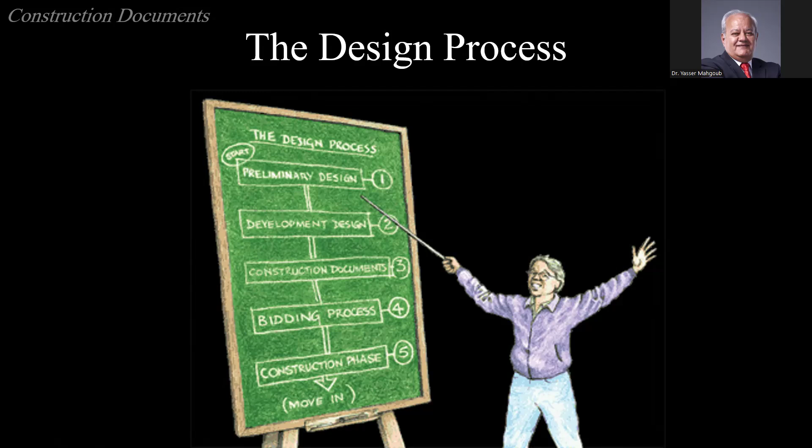So as we said, to remind you, the design process goes through these 5 important steps: the preliminary design or schematic design, the design development, the construction documents, and then the bidding and negotiation, and the construction phase, supervision. And then people start to move into their projects. So the construction documents are the middle and the most important part of your work.

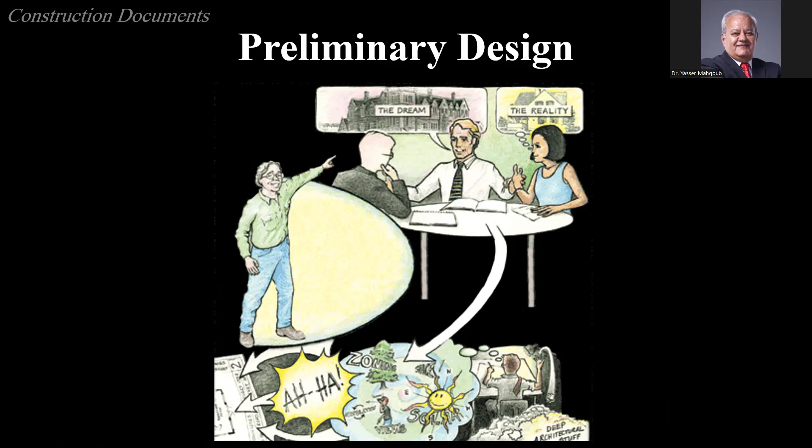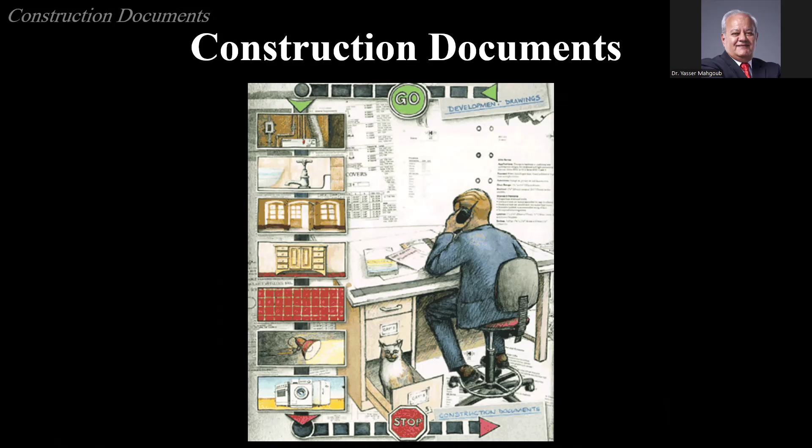So you start with discussions with clients, get their needs and requirements, and you think and produce a preliminary design so that they review and approve. As I said, the approvals should be in writing, not only verbal. And then you go to your office and spend a long time transforming this design into construction documents that will be sent to the contractor to use for the construction. So this is a very exhaustive part of the profession, and the part that takes most of the time and money.

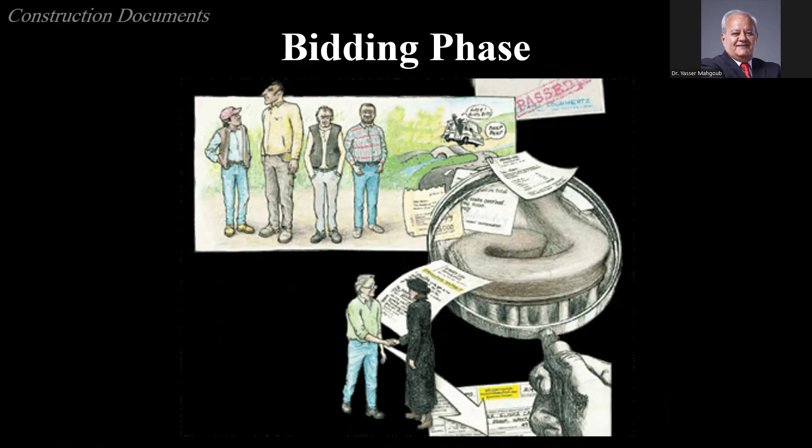After that, when you prepare the documents, you select the contractor based on the delivery approaches that we talked about last time. Is it going to be a single prime contractor or multiple prime contractors or design build, whatever? So you have to work with the client to select the appropriate contractor. Then the contractor will start the work, and you will be supervising the work, so you make sure that the design is implemented and constructed as you want it.

Because contractors might make mistakes, they might make changes, they might not follow the specifications and dimensions. So your job is to make sure that everything is being done according to your design and idea. Otherwise, you will get something else at the end. You design a horse and you get a donkey at the end. So you have to make sure that the design is constructed and implemented according to dimensions, materials, colors, specifications, everything according to what you want.

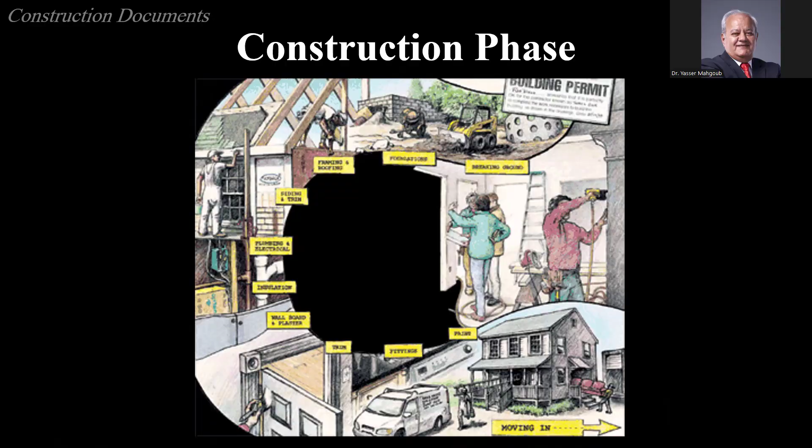So the tool that we use to achieve this is the construction documents that you prepare as an architect, of course, with your consultants, with your other engineers: structural engineers, mechanical engineers, electrical engineers. They all work with you to prepare the construction documents. They prepare the drawings and the specifications. The electrical engineer will give you drawings and specs. The mechanical will give you drawings and specs, and so forth. Everyone will give you drawings and specifications.

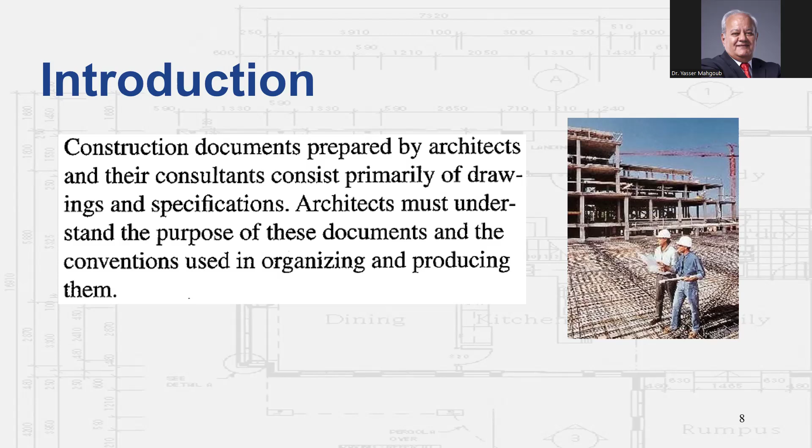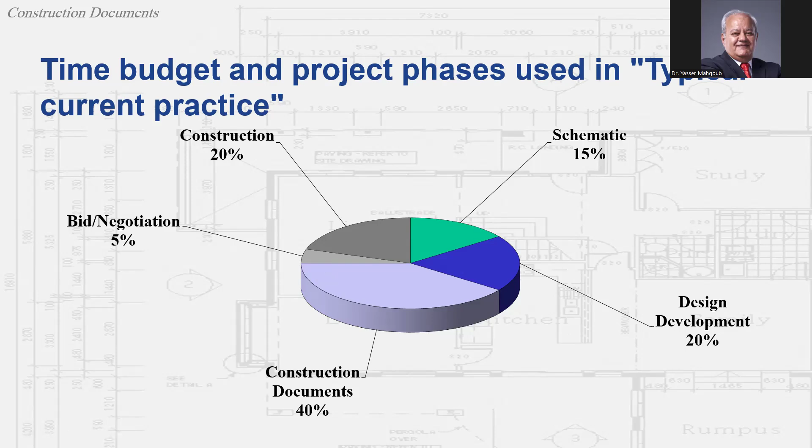So understanding the purpose of the documents is very important, so that you make sure that the drawings are according to your design, not changing it. And there are many conventions that you need to understand and learn to produce these drawings. As I said, we spend about 15% of our time and money in the schematic design. In the design development, which we consider part of the production of the working drawings, and the construction documents, and the bidding and negotiations, about 20, 25, 40, 65% of your time, energy and money will be spent in this part.

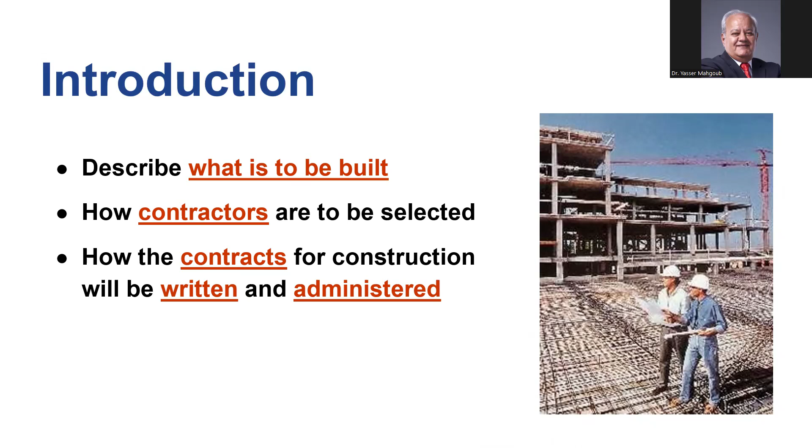So construction documents in general describe in full detail the design or the architecture that you want to build, how the contractor will be selected and assigned, how the contracts for construction will be written and administered, how the contractor will get his money from the owner, how they will be paid, against what. This will all be clarified through the contract documents, which are part of the construction documents. Many people mistakenly think that construction documents are the working drawings. No, working drawings are only one part of the construction documents.

So as an architect, you prepare the documents, the specifications, the schedules, and you assist the owner in preparing the contractual information. And for the contractual documents, you need to get a lawyer. They must be reviewed by a lawyer. Don't take this responsibility alone. You have to hire a lawyer to review any contractual documents required.

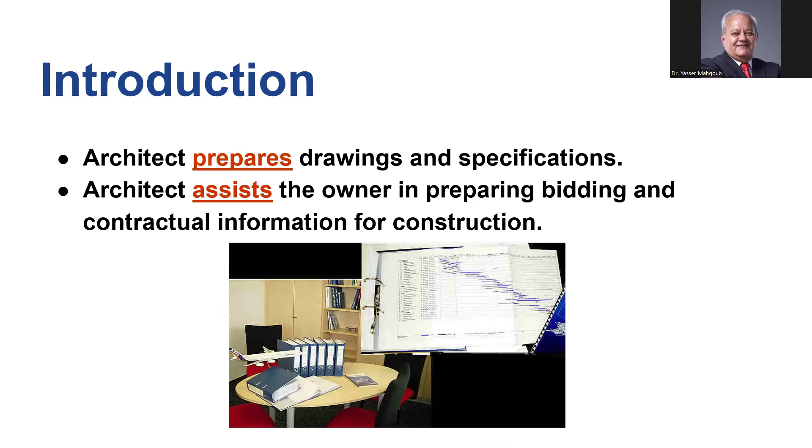So the construction documents communicate to the owner first, because he's the owner of the project, the requirements and the contractual obligations. How will that contractor be paid? How will the owner pay? When? What are the timings for the submissions?

What is the procedure? The contractor will send you a list of items that are constructed. You will go and check that this was done according to the specifications and to the claims that the contractor sends, and then you sign it and send it to the owner. The owner will pay the contractor the money. So your signature means approval of what the contractor did. So it's a big responsibility.

And this can happen six months from now. So you will be responsible for people's lives and owners' money. We will talk about it more in the ethics lecture. So as I said, it will be the base for financial approvals, transfer of money based on the claims sent by the contractor.

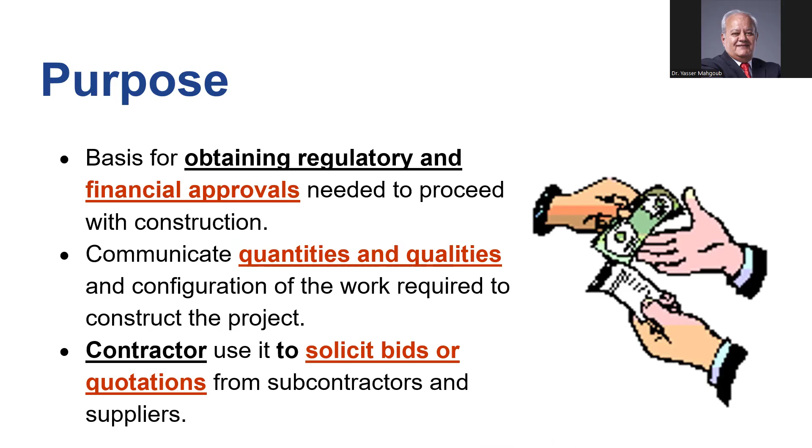The construction documents will tell the owner about the quantities, qualities, and configuration of the work required. And the contractor also uses them to solicit bids or quotations from the subcontractors and suppliers. So your documents will not stay in your office. They will be given to the contractor, and the contractor will give parts of them to the subcontractors. The subcontractors will take them to the suppliers. So they will be all around. So they have to be correct and reviewed carefully.

What would the contractor do? The contractor must think in detail about the construction means. It's not enough that you have a drawing for the building to be built. No, he has to think about the process. How will I get the machinery? How will I get the workforce? How will I get the material? Where will I place it? How will I protect it? Because materials can be stolen from the site. So all these methods, techniques, sequences, procedures. Site safety is very important for contractors. They have to make sure that the site is safe for the workers.

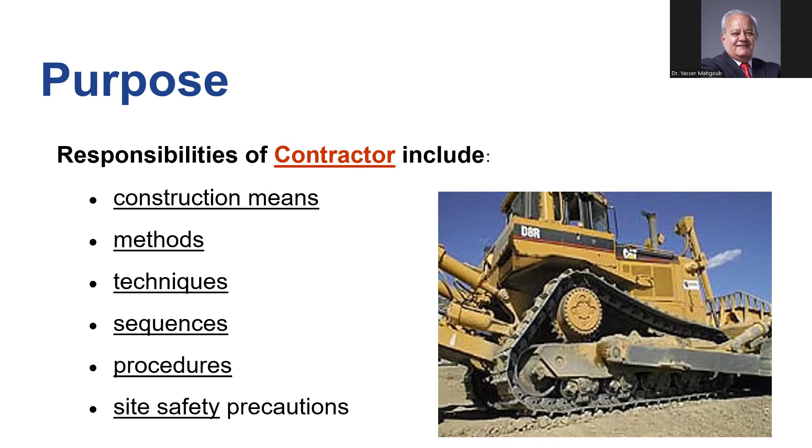They also include assigning subcontractors, a lot of logistics in the site that need to be considered, the sequence of work, who is doing what, when, because he needs to bring the concrete work and the woodwork and the glass work, and who's coming when, and how they don't interfere with each other according to a specific sequence and scheduling.

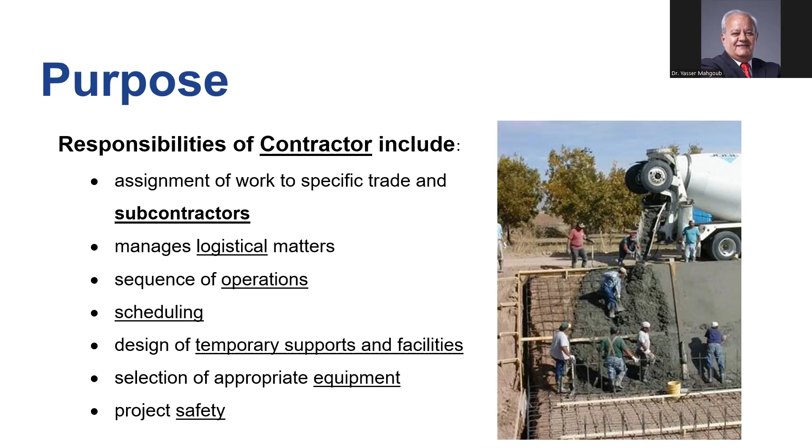They also provide what we call shop drawings. Shop drawings are also an important part of the contractor's work. Based on your drawings, they produce another set of drawings called shop drawings. These drawings specify how many tiles will be placed in this room and what is the distance of this tile. And they draw everything in full detail. And they send it to you to make sure that your 1 to 100 drawings are conforming with their 1 to 20 or 1 to 10 drawings. So this is also another responsibility.

So the construction documents are not only design or graphics, they are also legal and organizational documents. So they must be clear, no redundancy, no omissions, no missing information, no ambiguities, no contradictions between drawings and specs, because this is a very common problem, that you draw something and the people who are doing the specs or the quantities write something else. So they have to be coordinated. Or your drawings with the structural engineer.

In the ground floor, you draw the columns 60 by 60 all the way up the 20 floors. No, they can be 40 by 40 in the upper floors, and they can be 1 by 1 meter in the ground floor. So the columns will increase in size. So how will they affect the design, the corridors, the doors, the windows, and everything? So you have to review all this, the ducts, the risers of the electricity, the ducts for the plumbing, everything has to be coordinated.

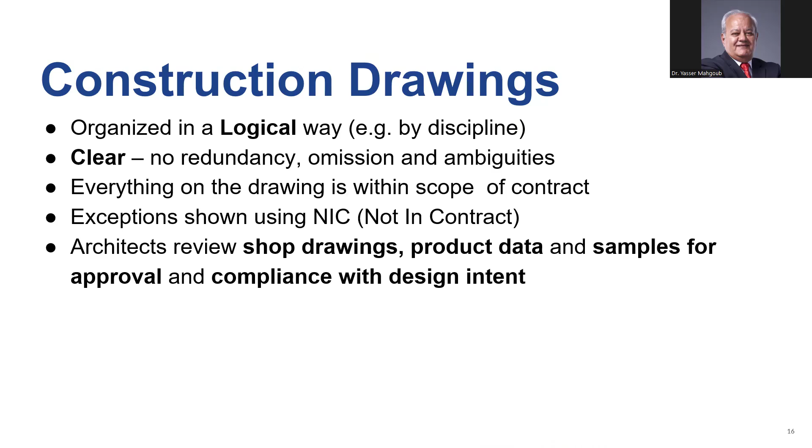Product data. The contractor will send you samples of materials and you sign the sample. Which marble you want to use, which color, which wallpaper. So you have to verify and approve all this, and make sure that it's complying with the design intent. So you have several roles as an architect.

One role is to assist the owner in preparing the bidding, but you are not required to prepare the legal documents. This has to be done by a lawyer. You have to hire a lawyer to do that. You are not professionally qualified to do this. You are required to assemble the bidding documents. So you have the drawings, the contractual documents, the specifications, and so forth, and bills of quantities all together. So you have to work on assembling this with labels, with names and everything.

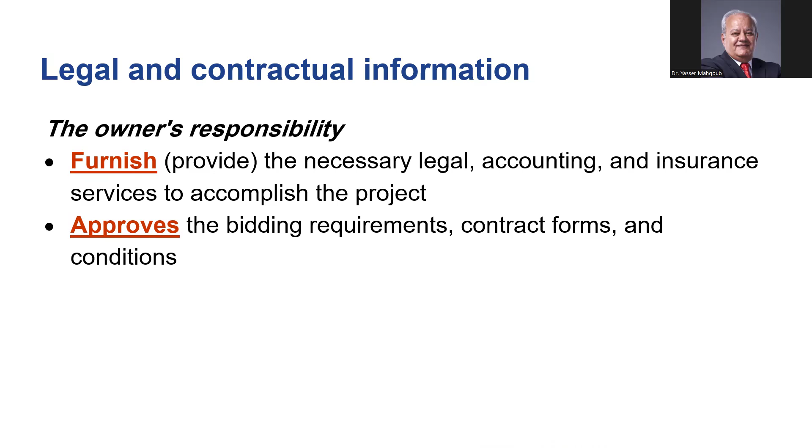And furnish or provide any necessary legal, accounting and advice for the client during the contract. And of course, approvals of the bidding. So the construction documents, they have several parts. They have the bidding requirements. This is an important part in the beginning.

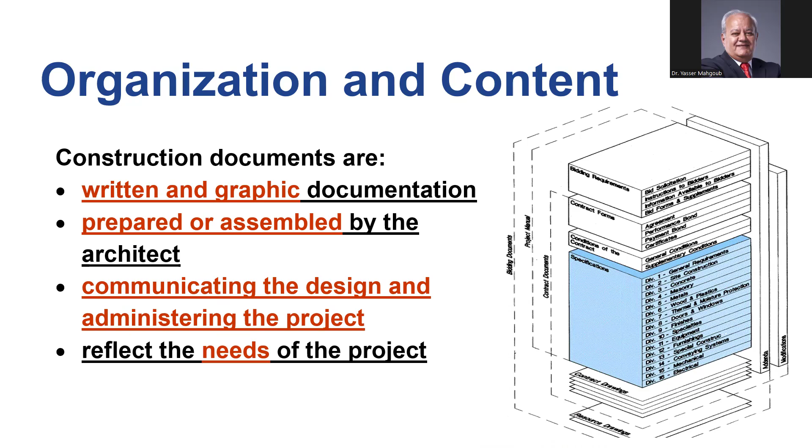The contract form, the conditions for the contract, all these are legal documents for the contract. And then you have the specifications for the materials and the contract drawings. And these are another story, the drawings that you prepare with your consultants and so forth. And the resource drawings or the shop drawings. So it has written documents. You have to know how to write them and review them, especially the specifications and bills of quantities. You need to prepare and package the document and make sure that they reflect the project.

So you have 3 items: legal documents, procedural administrative information, and architectural and construction information. So these are the 3 types of information that are in your construction documents: legal, contractual, procedural, administrative, and architectural and construction information. If you have large projects, you have to, of course, spend more time and energy to prepare. You have the option to separate the contract form from the contract conditions. So you can prepare several packages, not one book or one item.

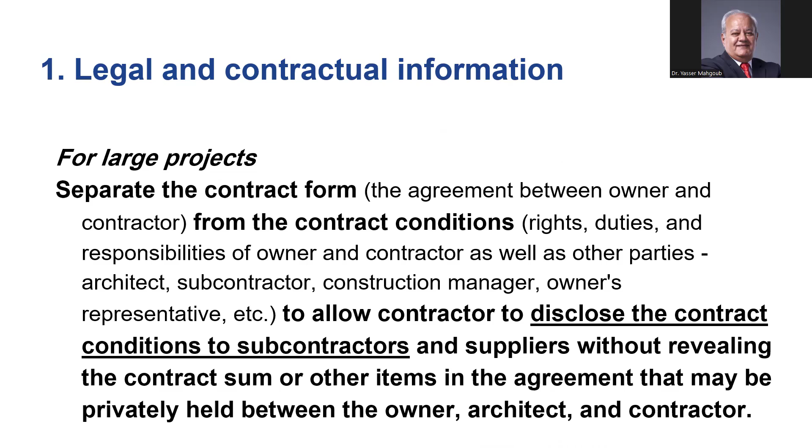This will allow the contractor to send documents to suppliers or subcontractors without the contractual information, without the money. So they can send it without revealing their bid or the amount of money they're getting for the project. Because, for example, I'm a contractor, I will put 300 pounds per square meter for tiles. I don't want the subcontractor to know this information. I will send them the request and they send me their offer, which is like 200 pounds per square meter. So I will take that. The contractor will, of course, gain the difference between the 300 and the 200. So you have to make sure that the information can be divided and separated between the contractor and subcontractor.

For small projects like a villa or an apartment building or something like this, we put all the documents together, and then the contractor can work with it later. As we said last time, delivery approaches affect the packaging. We talked about the different types of construction documents required for the one single prime contractor, multiple prime contractors, design build, early award, fast track. Each type of delivery approach requires a different type of packaging. So if you have one project, one prime contractor, you have one package.

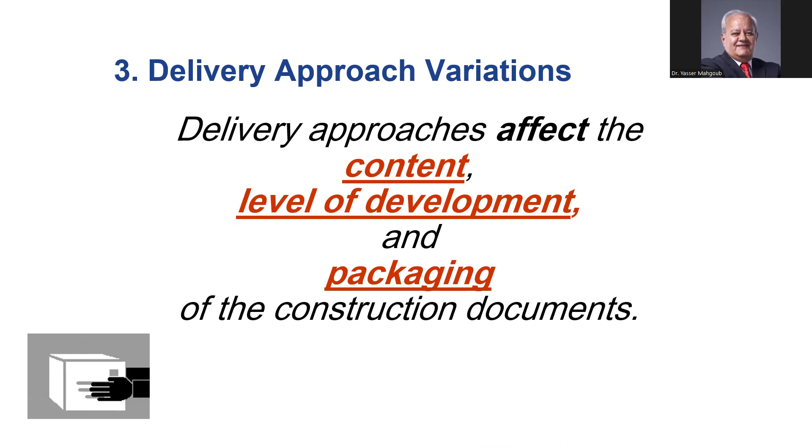If you have 3 prime contractors, we need to divide the drawings, the specifications, the bills of quantities, the contractual information into 3 parts according to the division of work. So you have to make sure, before you start preparing construction documents, you agree with the client what type of delivery approach we are going to use, because the preparation of the construction documents is different from one to the other.

As we said, we have 6 items that we consider part of the construction documents. The drawings, the working drawings. I think you did some projects, working drawings. The specifications, we have two types of specifications. General specifications, these are following the specifications of the country you are in, and there are special specifications for specific types of buildings or items in your project.

And of course, there are the bills of quantities, where you provide all the items in the project one by one, item, quantity, so that the contractor will put the price and get the estimate for this item. And then you add the items, and you give the whole estimate in one number.

Then we have contract forms and conditions. These are the contractual information. What are the contract? The contractor must know the contract before bidding. Maybe he would not like the contract setup. It's not suitable for him, so he does not go into this tender. So you have to provide them with the contract forms and conditions before the bidding.

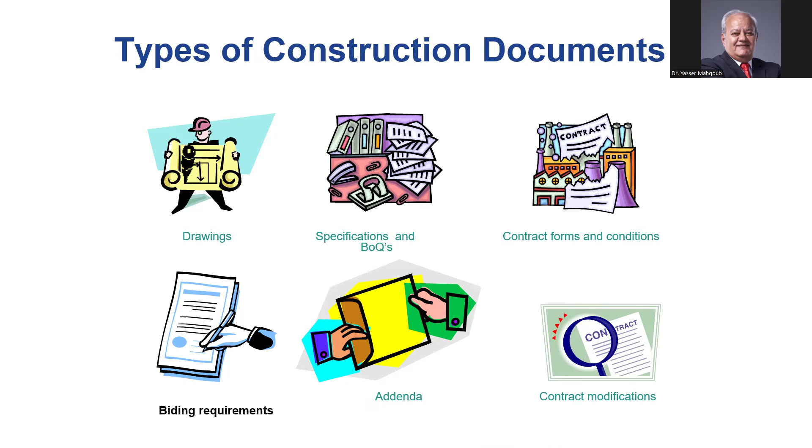So the first part that we do a lot of work with are the drawings. You are the leader of the design team: the structural engineer, the mechanical, the electrical, the plumbing, the sound, the light, everything. So they will all work according to your drawings. So you start with architectural drawings, you send them to the consultants, they sit with you and discuss their needs. You start to change, adjust, and so forth, and keep having meetings until you reach the final stage.

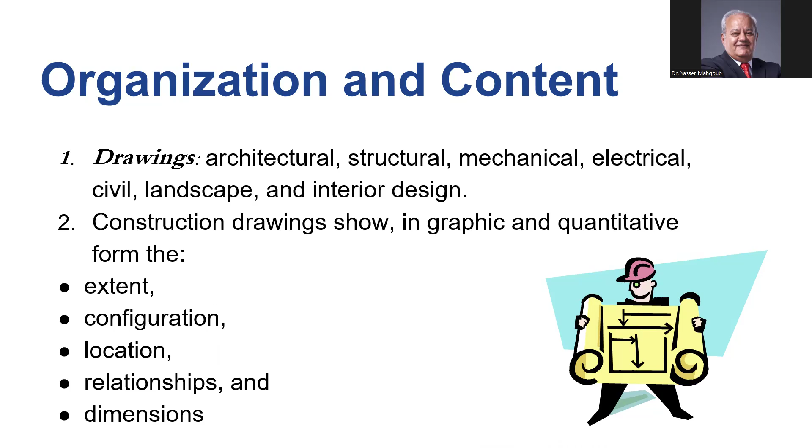The construction documents show the construction drawings, they show graphics, and more important than the graphics is the information, the information in dimensions and in specifications. So you have to write on the drawings all information needed for the construction. This includes the extent, the configuration, the location, the relationships, the dimensions, and the dimensions must be as needed. Don't put too much dimension so the drawing cannot be read. Put only the dimension that is needed for the construction.

A set of drawings is an organized presentation of the project. This will present your project to the others. You can put photographs. You can put graphics, schedules, specifications for small projects. So sometimes we write the specifications on the drawings directly instead of producing separate books.

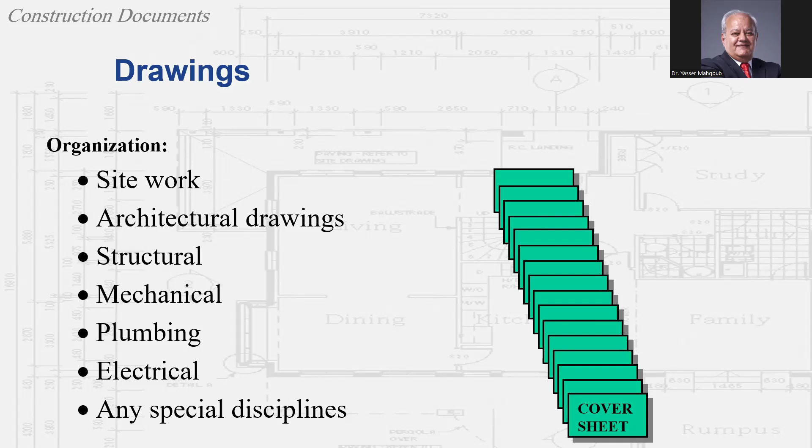So as I said, the first thing you have is a cover page for the whole set of drawings. You start with the site work. So you have the layout with the dimensions, architectural, structural comes after the architecture, mechanical, plumbing, electrical, and other disciplines. So they must be arranged and numbered and referenced to each other. So you reference your drawings to the consultant's drawings.

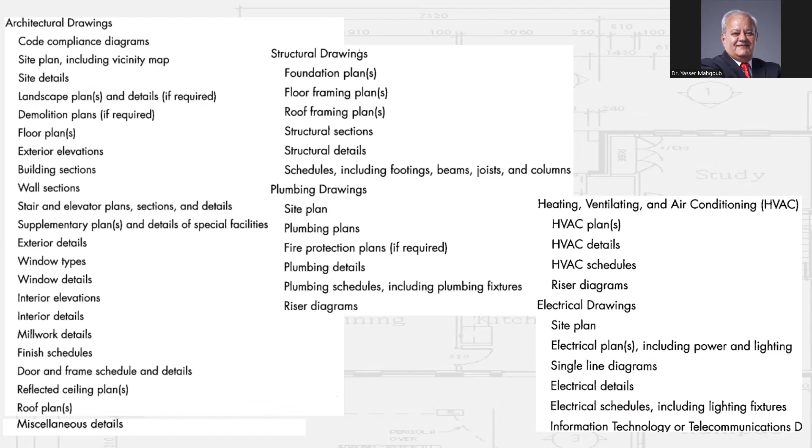So this is an example of some drawings that you might need for, of course, a medium-sized project. You might need 100, 150 drawings, large size, so that they can be sent. So they have to be numbered, labeled, referenced to each other, as we will see, and so forth. All these are different types of drawings.

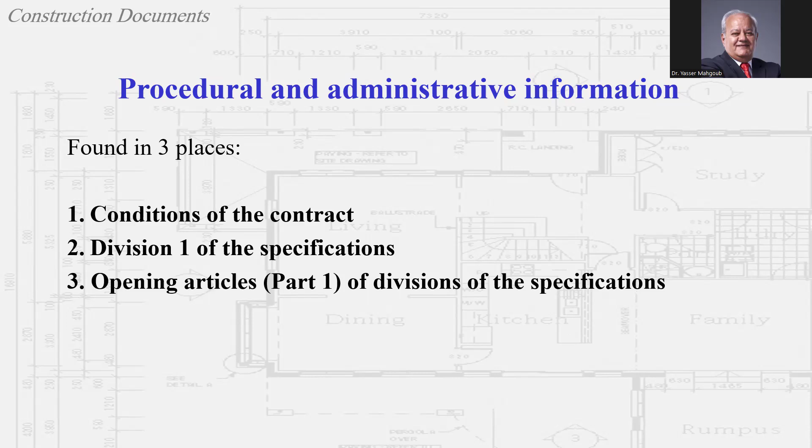Procedural and administrative information are found in several parts. They can be found in the conditions for the contract. As we will see, in the specifications, Division 1 is specifically for the procedural and administrative information, and the first part of the specifications is also part of this information. So this is important because it shows how the shop drawings and samples will be delivered to you.

They must be delivered with a cover letter. I will send you a sample of tiles with a cover letter, and I want you to review it within 1 week. If you delay, this will delay the construction. So you have to review and finish your work and send it with a cover letter. So during the construction, these legal procedures are very important because the contractor will take all opportunities to increase the time or increase the cost.

How the contractor will be paid, the payment requests, when will they be sent, weekly, bi-weekly, daily, you have to tell them. How change of work is done. You cannot just go to the site and say, no, change this color. It has to be communicated in writing. Which part, what amount, what time will be taken, and so forth.

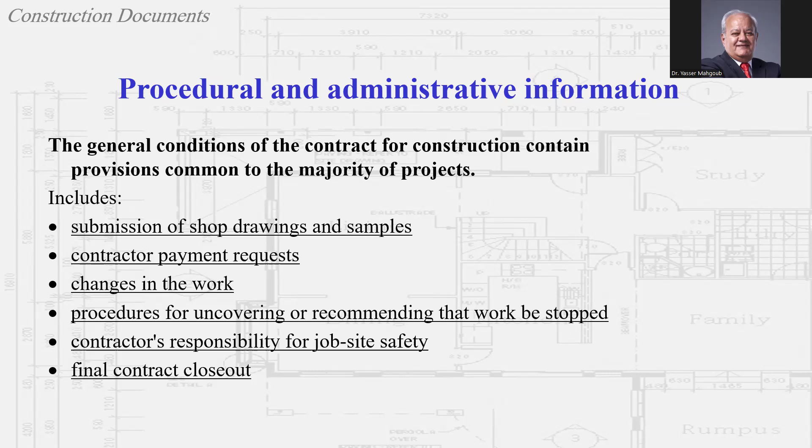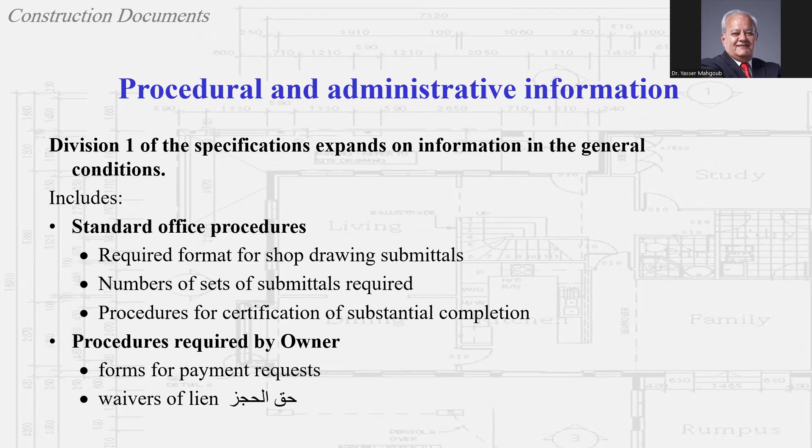And forms of payment, waivers of lien for the contractor. Procedures also covering applicable codes, requirements for record documents. These are also important types of drawings. We have working drawings and we have shop drawings. Working drawings are made by the architect. Shop drawings are made by the contractor and reviewed by the architect.

After the project is finished, we also produce what you call as-built drawings, because maybe during the construction, they moved this thing here and they moved this thing there, or they closed this door and opened another. So some changes might happen. So we produce drawings, what you call as-built. And these are very important, especially for large projects, to know where the changes happened and how they affected the project.

Temporary facilities: as you see, there are always cabins for engineers, houses for workers. How will these be removed after the construction is finished? And also during the construction, you have to test the materials, especially the concrete. So you must define who is going to do the testing and which laboratory. A university laboratory or research laboratory, they take the concrete cubes and test the strength.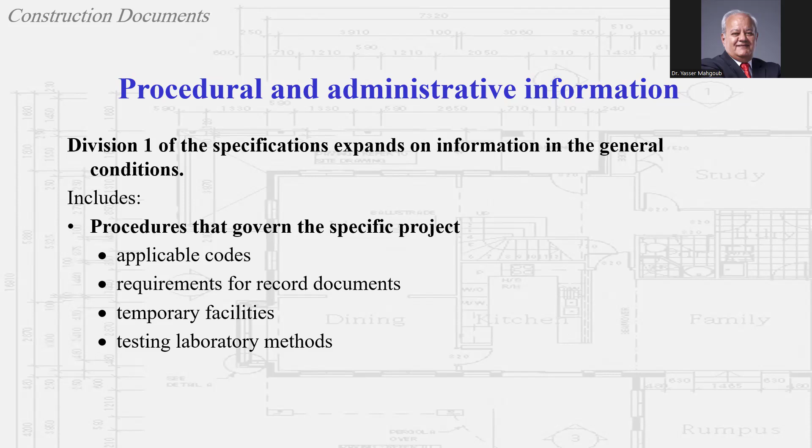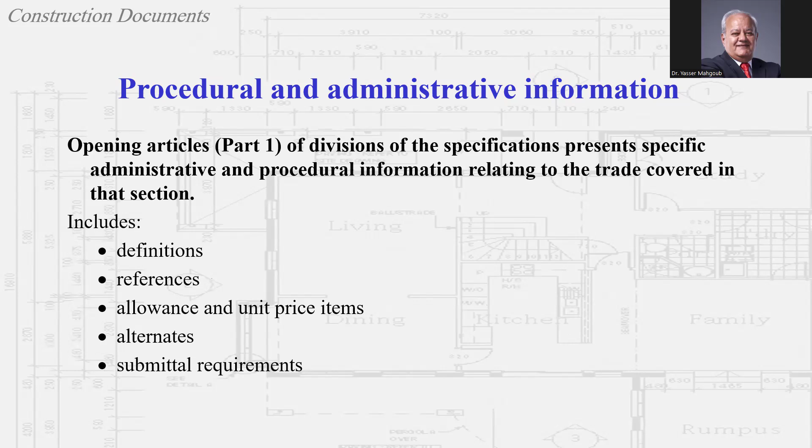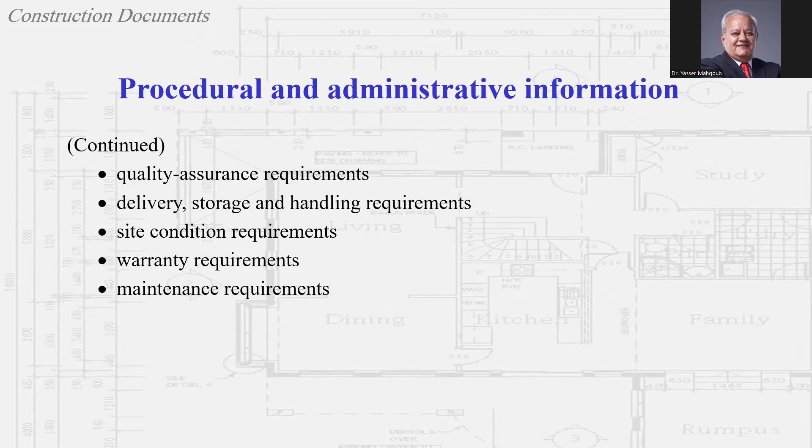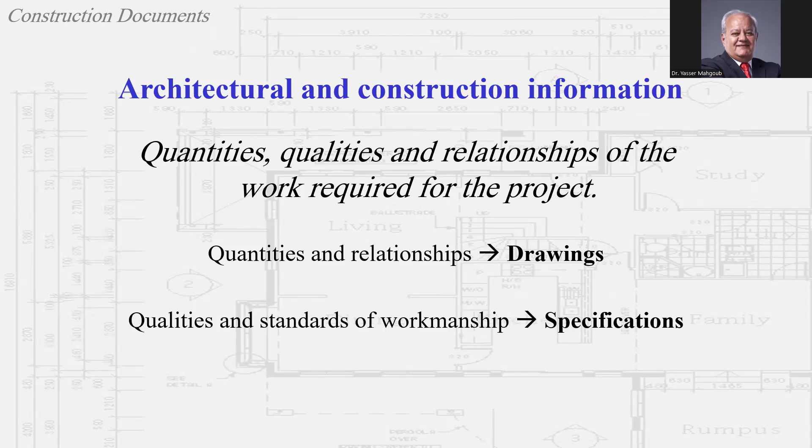So we have many definitions of terms, references, allowances, and unit price items. All this is in the procedural and administrative information. So it's a very important document that you should review carefully and make sure that it is covering all the items that are needed. So as we said, the construction documents have the quantities and relationships that are shown in the drawings, and qualities and standards of workmanship that are shown in the specifications. And these two are equal. They need to be compatible, with no contradiction between them, the drawings and the specifications.

So the level of detail is very important. The problem is that with the computers, you make tick, tick, and you have a dimension. Tick, tick, you have dimension. In the past, it was very difficult. You have to use only minimum dimension and you have to calculate the dimension yourself. Now, you put the dimensions quickly.

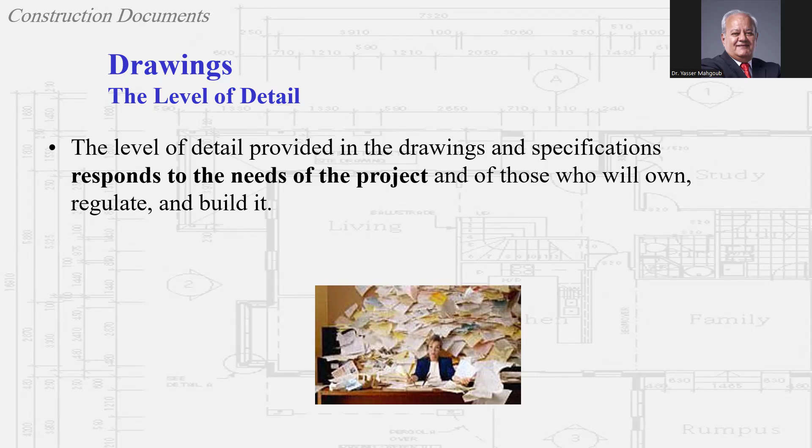So students tend to put a lot of dimensions everywhere. This is not correct. So the drawings are very busy with dimensions and signs and so forth. No, you have to be specific with the dimension, because this will be read in the site. This will be printed and used in the site by the subcontractors and the suppliers and so forth. So this has to be specific to what you want.

The comprehensive and detailed documents are needed for competitively bid public projects. You have to provide all the information. Any unclear or incomplete items, the contractor will negotiate with you. The contractor will be very happy if you write that this is a door 1.5 meter, and in the specs it says a door 1 meter.

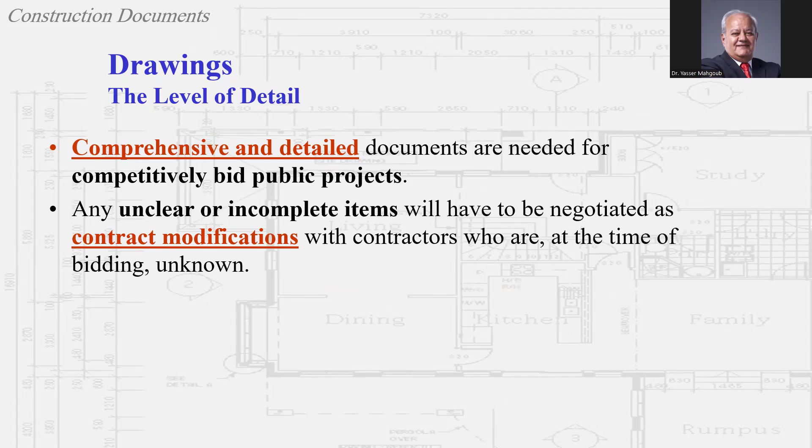They will be very happy, because this is a discrepancy between the specs and the drawing. So they tell you, oh, this is a change order. Sorry. So you have to pay for the 0.5 extra. So you have to make sure that all the information is as needed.

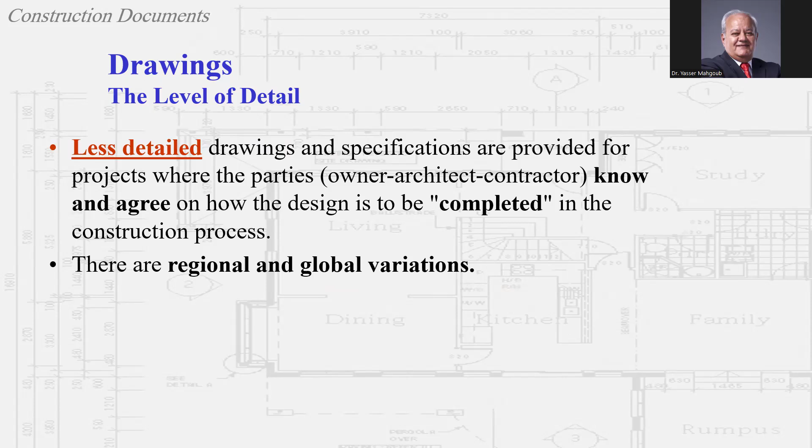Less detailed drawings and specs are provided for projects. We have a small project with known early award contract. You need to provide completed but minimum details. If you participate in an international project, you will find an amount of details and coordination beyond belief.

Scale. What scale do I use for the drawings? The standard scale is 1 to 100. Okay. 1 to 200 is almost impossible to provide working drawings. So we want the smallest scale, but to be clear and readable. So 1 to 100 is the most reasonable. And then you can take parts and make details of it, 1 to 50 or 1 to 20 or 1 to 10.

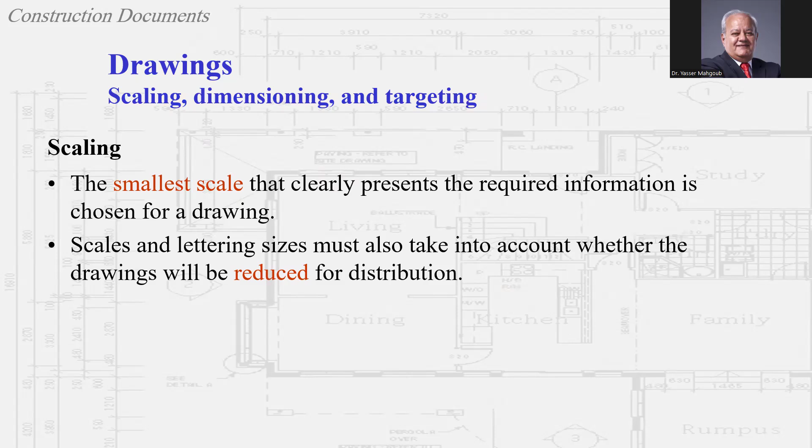Scale of the dimensions, the lettering, all this must be coordinated and visually readable. And use only necessary dimensions. Don't cover the whole drawing with dimensions for no reason. Tick dimension, tick dimension. No, you have to be very selective.

The contractor is not allowed to measure from your drawing. They must read the dimension only. So you have to consider yourself in the site, and you want to build this. How will you build it? You have to provide the necessary dimensions on the drawing to be built. The contractor must not take a scale and measure from the drawing. This is not allowed, because drawings can be printed in different scales.

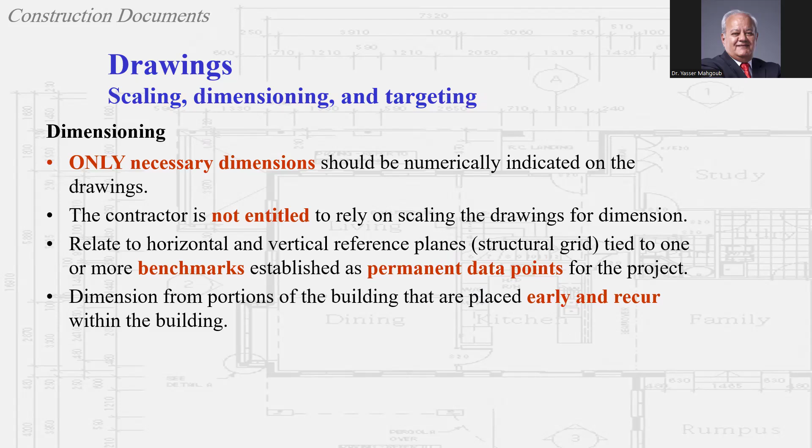In the past, they can shrink from the water and the humidity, or they can be turned or stretched. So you have to provide dimensions that are appropriate for the construction. Where strings of dimension must add up to a specific number, it's often wise to note one of the dimensions as a plus or minus value.

Now, when you start the construction, you have walls, but you have plastering. The amount of plastering is not fixed. It can be 1 centimeter here, 1.5 here, and 2 here. So the dimension between the walls will not be the same as the dimension after the plastering.

So you have to be flexible, that maybe I will take the dimension from this side of the wall, the door, the windows, the door, but I will not give the last dimension. Or if I give it, I say it's plus or minus, because there might be some variations.

Okay, that's why don't rely too much on the computer. The computer will give you all the dimensions, but this is not correct. In reality, it's not correct. You have to think about what dimensions do I need and how will it be built.

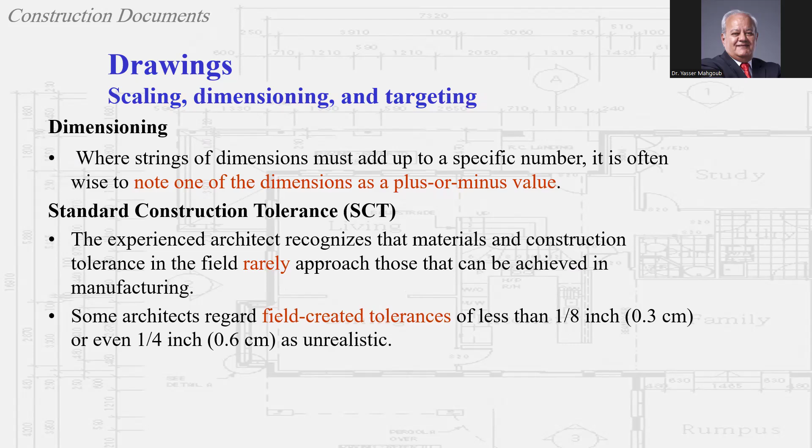We also have what we call standard of construction tolerance. There is some degree of, يعني, not fitting dimensions. So we call it field created tolerance, which is about half centimeter, 0.3 centimeter, 0.6, for the difference between the drawings and the actual site.

So in order to draw or to make good construction documents or good working drawings, you have to understand the process of construction and how it will affect the dimensioning. What will be built first? The skeleton, and then the walls. And you have to think that the skeleton of different floors is different.

The dimension of the column in the upper floor is 30 by 30. In the basement, it will be 1 meter by 1 meter. And it keeps increasing during the different floors. So you have to provide dimensions according to these changes. So after the structural engineer finishes their drawings, you have to apply them to the architectural work again, based on their schedules. They provide you with a schedule of the column dimensions for the different floors.

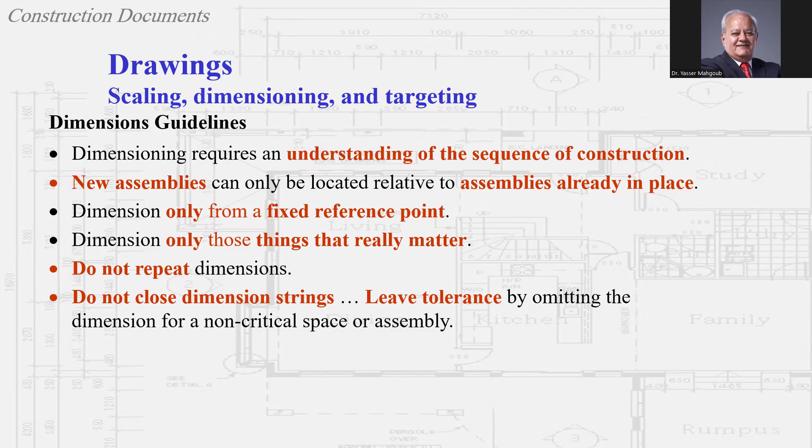Do not repeat dimensions unnecessarily. Do not close dimension strings. Leave tolerance at the end that can be changed. Dimension only those things that really matter. And you don't dimension things that are obvious. And I don't keep dimensioning the tiles on the floor or something. This is not useful.

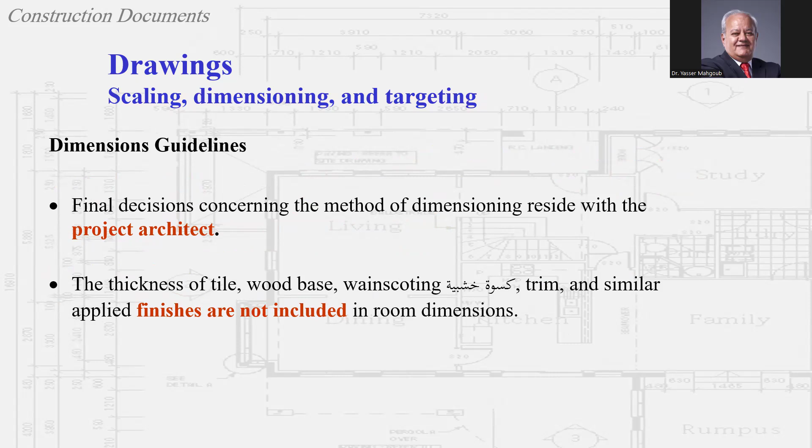All the decisions regarding the dimensions are the architect's decisions. So you have to make sure that the dimensions are coordinated with the sub-consultants. Vertical dimensions appear on elevations or wall sections only. Okay, so you have to make sure that the plans show horizontal dimensions. Elevations show vertical dimensions. Don't show horizontal dimensions on elevations or sections. This is wrong. Horizontal dimensions show on plan only.

A dimension should be from the top of the foundation, finished floor, or similar fixed references. You have to also give dimensions to the fixed elements, not only the finished floor. The finished floor can be variable, but the top level of the concrete is fixed. So you have to provide dimensions.

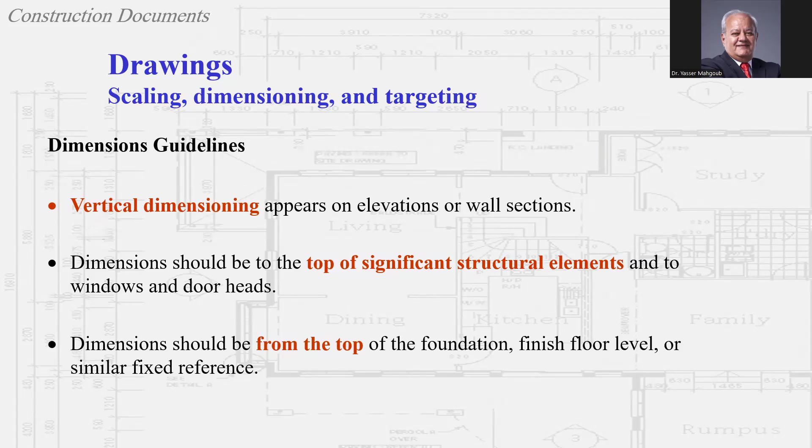Structural engineers reference to the bottom of the slab, not the top of the slab. Architects reference to the top of the slab. But the structural engineers want to know the distance between the finished slab level and the bottom of the upper slab, because this is what they designed the columns for.

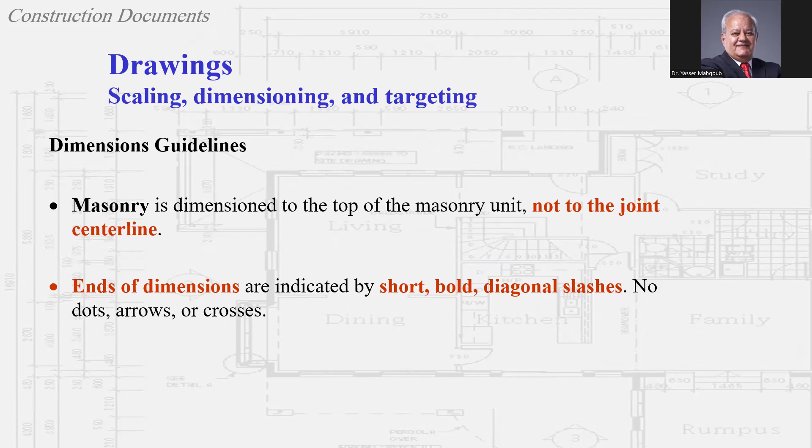You can avoid many dimensions by using a line or divide into 2 equal parts or divide by half. And you need to assign someone to check all the dimensions of all the disciplines: architectural, structural, mechanical, and so forth.

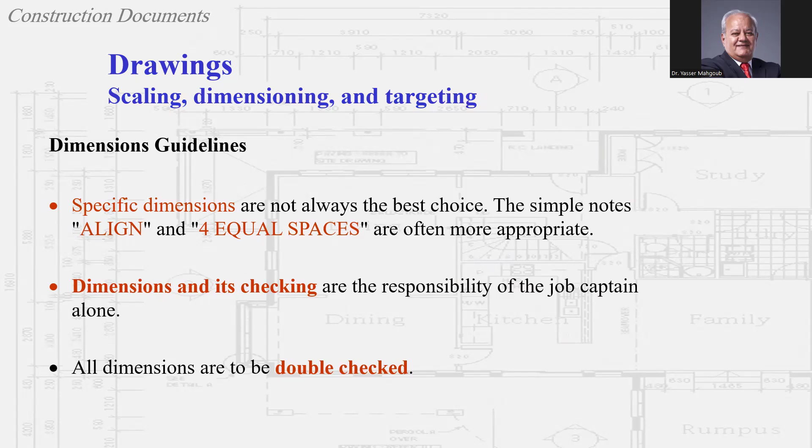We have what we call targeting. Targeting, some people call it referencing, means that you need to provide details of parts of the plan or section in another drawing. So you use a detail indicator. You put a dashed circle around the area and reference to D2 over A512. So this detail, you find it in area D2 in drawing A512.

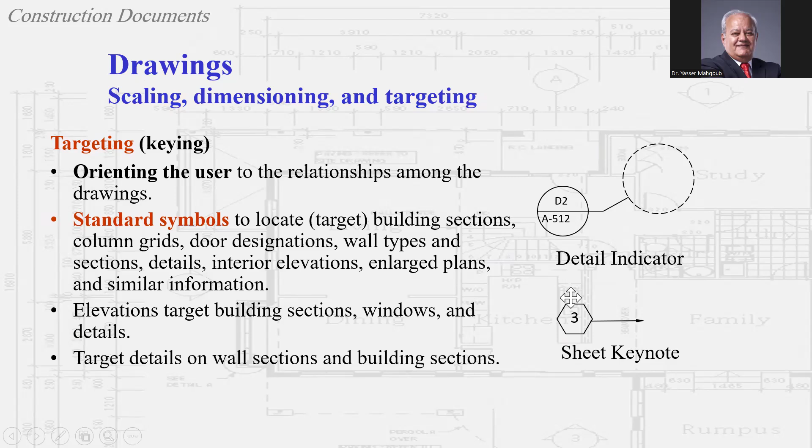So you go to the drawings, A512, and then area D2. So this is the detail. We divide the drawing into several parts. The hexagon is for the notes. You make this and write the notes in the drawing.

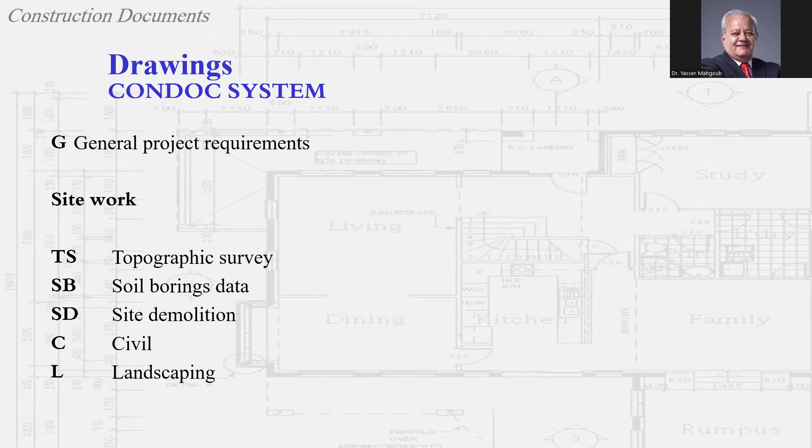So you name the drawings according to the type of work. So we have topography, TS, soil boring, SB. So these are all letters used for the type of drawing. Architecture, A. We also divide the drawings. Assume you will have schedules and master keynotes from A000, A001, all the way to A100.

So the numbering of the drawings is very clear. A100 to 200, these are plans. 200 to 300, elevations and sections. 300, 400. So you have different divisions of drawings, so people know where to find them. So if I read on a drawing that it is A310, it means it's vertical circulation, drawing number 10.

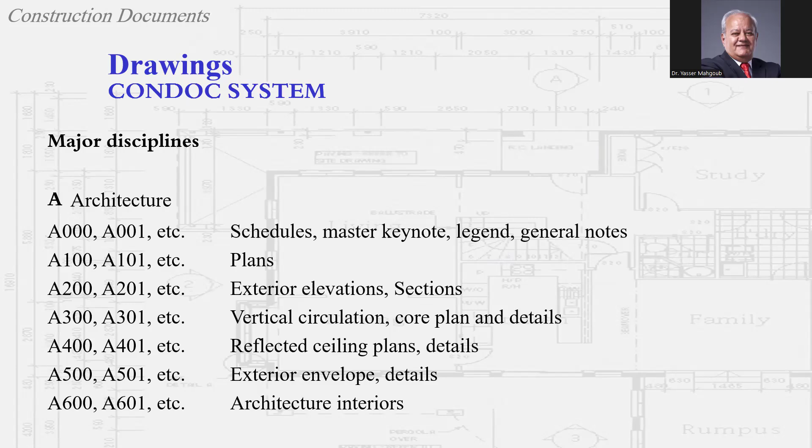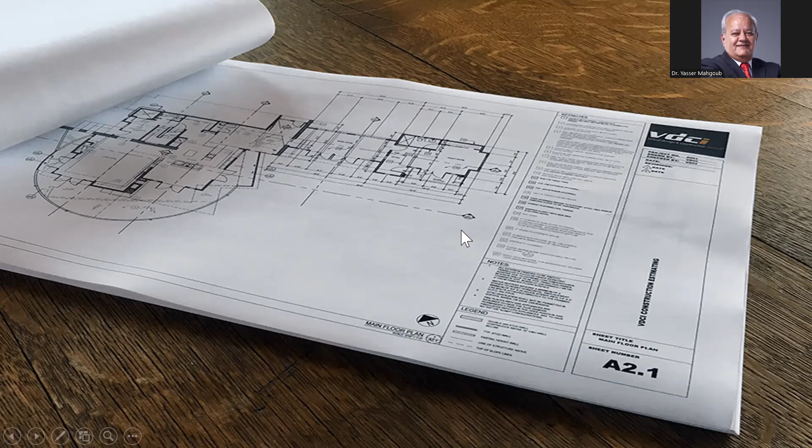So you end up with a set of drawings that can be that big. And you should know how to find them quickly. So A2.1, this is the number of the drawing. And the drawing, you see that it has the title, it has notes, different types of notes and legend, the north direction if it's a plan, and the dimensions for the center lines and the interior. So it has to be within a set of drawings.

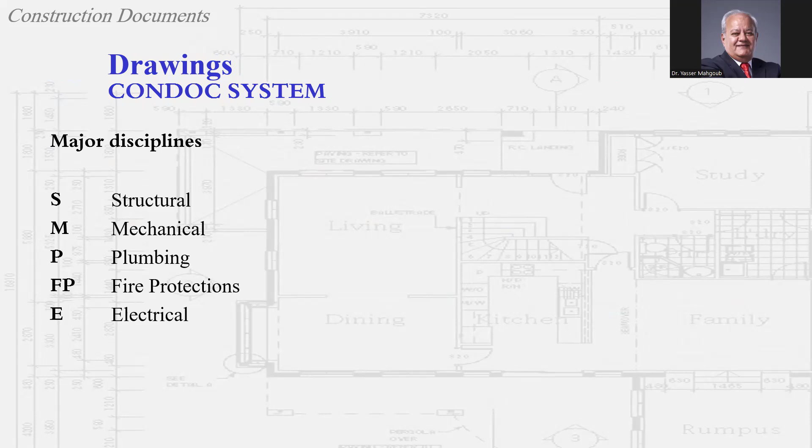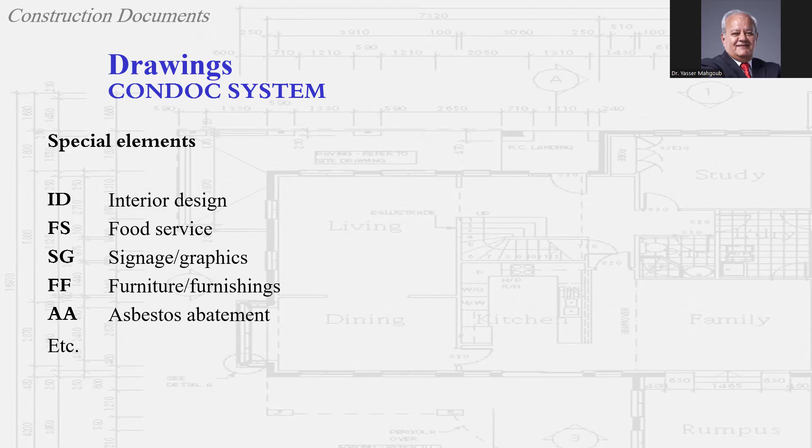The structural take the S letter, mechanical M, plumbing P, fire protection, electrical, special items like interior design take the title ID, food services, signage, F and F, furniture and furnishings, asbestos. So this is how we divide the drawings.

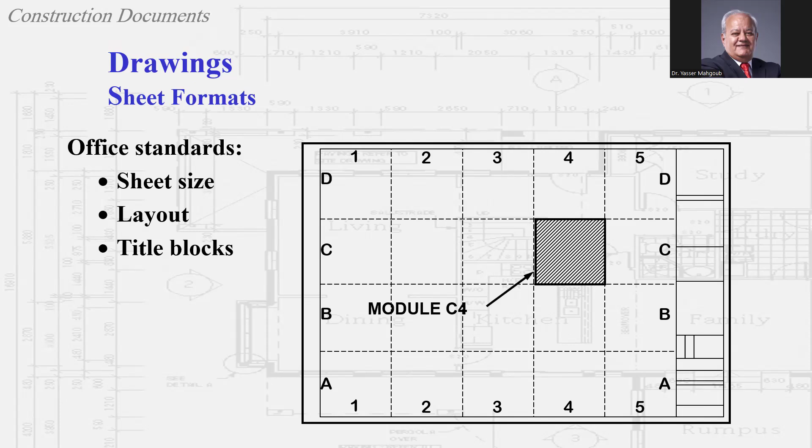So drawings must be organized, and this is your role as an architect, a lead architect. You must take responsibility for providing all the coordination. Some offices had these drawings already printed in the past. Now they have computer files that you all should follow. So don't just draw on any paper. Now you have to know how it will be printed and how you will divide the drawing so that it can be referenced to each other.

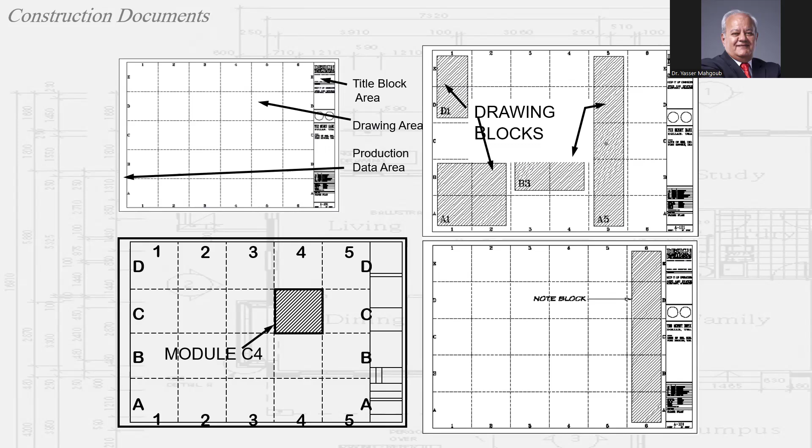The title block is very important. It can be vertical or horizontal, and it should contain the name, the title of the project, the owner, and a place for the stamps. The number of the drawing must be here. Why? Because these drawings end up being folded. You cannot send the drawings as a roll to the site. They must be folded in a certain way. They fold it like this.

Let me take one page from here. So this is your drawing. You fold it twice like this, and then you fold it back like this, and you fold it back like this. When you worked in the internship, you must have done this. And then you fold it like this. Okay? So you end up with the drawing like this, with the title block here. When you fold it like this, you will read the name of the drawing here. So you can quickly go through the drawings and get the drawing that you want to use.

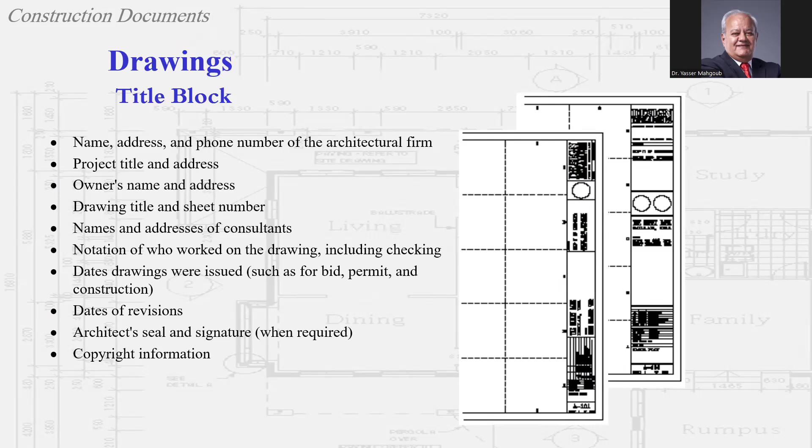Imagine that this is 100 by 70 centimeters, and you open it. On the site, they usually fold it like this so that they can see the part that they are working in. So it has to be flexible. But this is how you fold the drawing. 1, 2, 3, 4. So you end up with the title block here. So you always can see this part. What is the name of the drawing? What is the title of the drawing? Who drew it and who reviewed it? This is very important because you want to go back to them.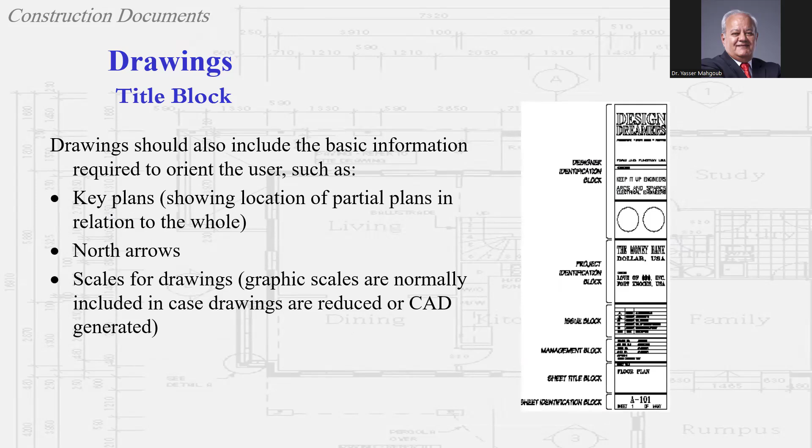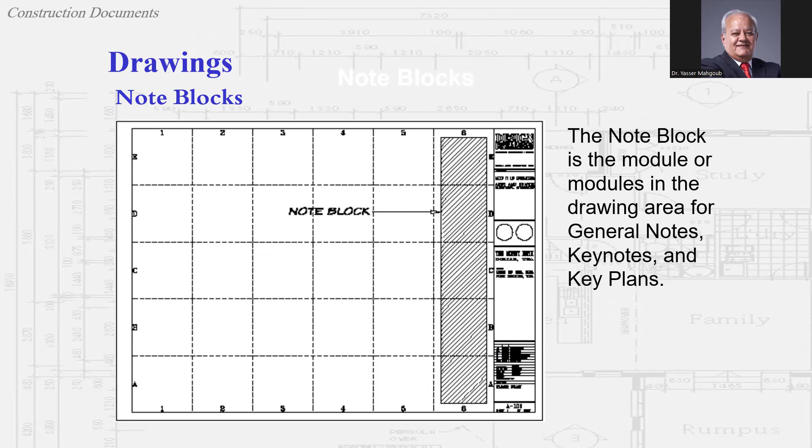So it can also contain a key plan or a key section. If you have plans, it's good to put a key section so that you show which plan. North arrow, key section. So this is the responsibility of the architect to organize the drawings, standardize the drawings for the office. In the past, we used to go and take a calc, print it, ready with the block and everything. Now it's computerized. So you have the title block computerized, so you can print with the title block, and the second part of the drawing is specialized for the notes.

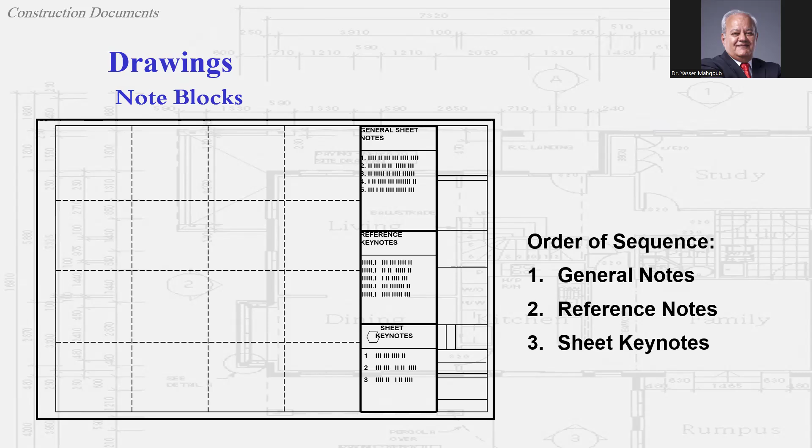Structural, mechanical, electrical, they write a lot of notes. So they take a large part of the drawing to write their notes. They must write the notes on the drawing related to the reinforcement, related to the wiring, related to the piping. So it has to be done. Another part, of course, which takes a lot of time, is the windows and doors. Windows and doors must be specified one by one. Provide the dimensions, the quantity, the specifications, and the design. So you must have doors and windows.

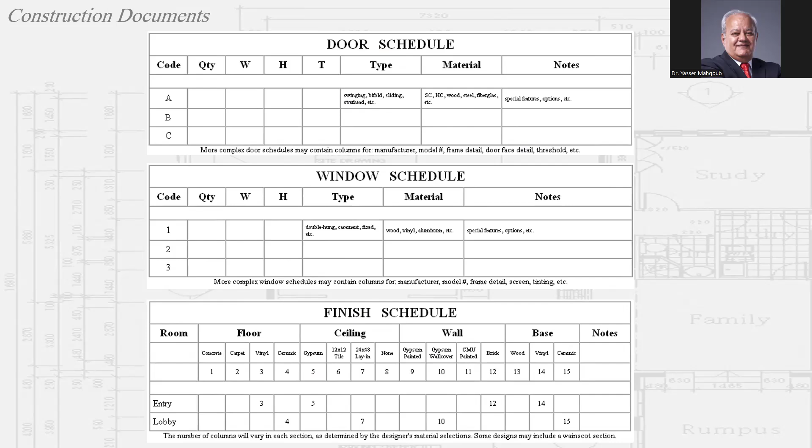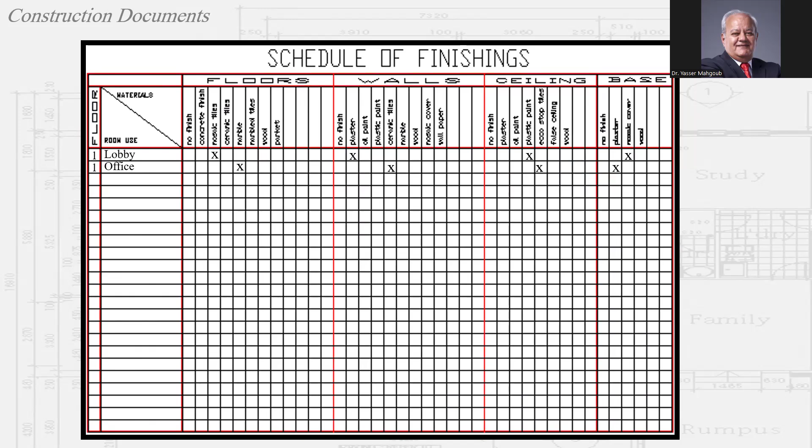Every door and window type in the project must be specified alone. And this is scale 1 to 20, for example. This will be drawn 1 to 10 or 1 to 5 in the shop drawings. So your drawings are just the base for the following drawings. And then the finishing schedules. This is a type of finishing schedule. You write the name of the space, and you have the floors, walls, ceilings, and base. So you have all the types of finishings, and then you select the type. This makes it easier to change later for any changes that the owner or the contractor needs.

The last thing we need to talk about today is the cartoon set. This is a very good tool for the architect who is managing the work. Before you start the project, you have to have a set of A4 size papers of all the drawings sketched. This drawing will have the layout. This drawing will have the plan. And then you write, when did it start? Who is working on it? What is the condition? Is it finished or not? When is it expected? So when you are sitting in your office, you can monitor or manage the team that works under your supervision. Who is doing what and when and so forth.

Okay, we will stop here today and complete this presentation next time, inshallah.